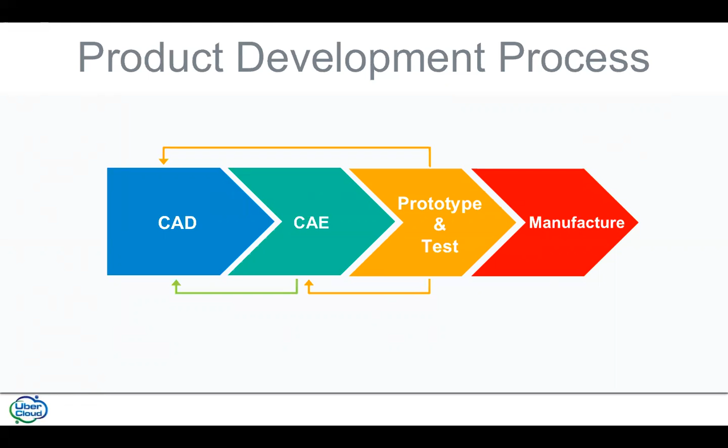Coming back to this process, as you're all well aware, if something fails after prototyping during testing, which is a very expensive phase, going back and repeating the whole process will only add up to the costs. And product time to market and development costs will increase as changes to design are introduced later in the product development process. So by introducing simulation early in the design process, you can speed up product time to market by starting with a mature design validated for simple test cases, save costs by shortening time to manufacturing, introducing less design changes, and also by reducing the number of simulations required to be run by analysts.

And then through design exploration, you can create more innovative designs and become more competitive. So rather than going with what you know would work, you can actually try out new ideas. So wouldn't it be great to let designers do preliminary simulations and let CAE engineers work on the more complex scenarios?

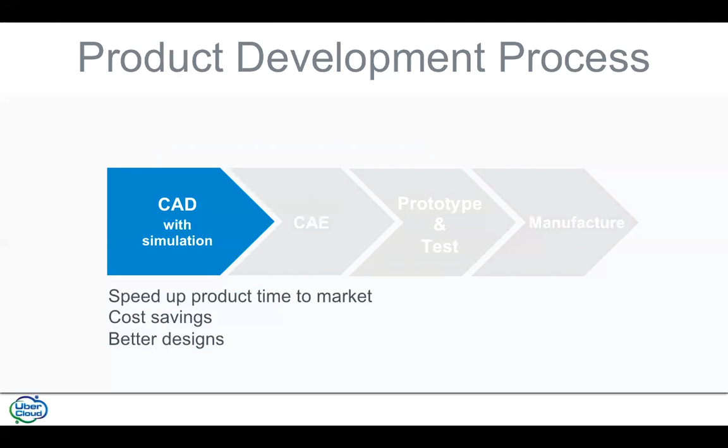So far, there have been barriers. Obviously, with many commercial CAE software, simulation expertise is required to get accurate simulation results. Then, specialized hardware, such as CPUs, GPUs, are needed to perform the simulations, which can be very expensive. And IT resources have to be available for hardware, software, purchasing, licensing, configurations, and so on. And all of these can easily lead to very high costs.

Because no simulation expertise is needed to run ANSYS Discovery Live, necessary steps to run a simulation such as geometry cleanup, meshing, solving, post-processing will all be handled by Discovery Live, and you'll be able to set up your simulation within minutes through a simple interface.

And then with cloud computing, there's no need to purchase expensive hardware. So you'll only pay for what you use. And there's also no need for IT resources. Your cloud provider will take care of everything. You'll get access to the hardware with the software pre-installed and ready to run. And of course, all of these will translate into cost savings. And not just from the implementation and execution perspective, but also there'll be cost savings because by starting with a more mature concept, product development process will be much shorter.

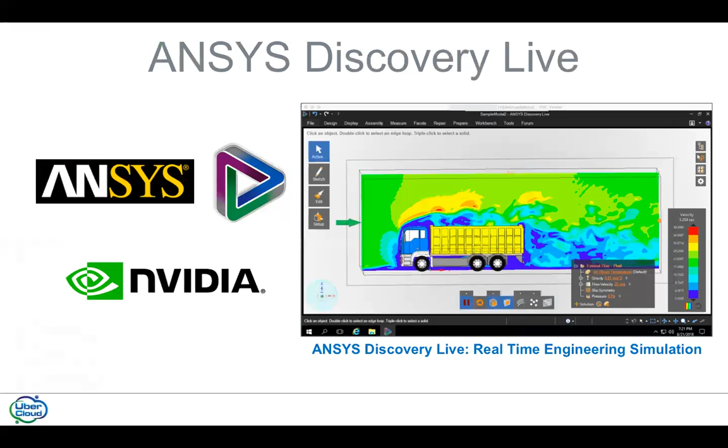And if you're not familiar with the concept, simulation in the cloud provides a cost-efficient, fast alternative to running simulations on your workstation or on-site clusters. Through a cloud provider, you can get access to the latest best-in-class hardware without large investments, and you can pay for what you use and how much you use.

UberCloud can give you instant access to a computer environment in the cloud with Discovery Live pre-installed and ready to run, and also equipped with the latest NVIDIA GPUs. So this way, you can focus on your design and not spend your time and resources dealing with things like hardware, software purchase, setup, licensing, installation, or configuration. Once you're signed up, all you would need to do would be to log into your cloud environment from a web browser and run your simulations.

Which also means you don't have to be present at the office anymore. You can actually work on your design exploration from the comfort of your home. And this is also how I recorded the demo I'm going to show you within the next minutes.

And last but not least, UberCloud can also provide you with support for break-fix services when something fails, and can take care of software maintenance. There can be multiple ANSYS releases a year, and we can make sure you work with the latest version or your desired version of the software. And also we can provide you with training on how to work efficiently within the cloud environment.

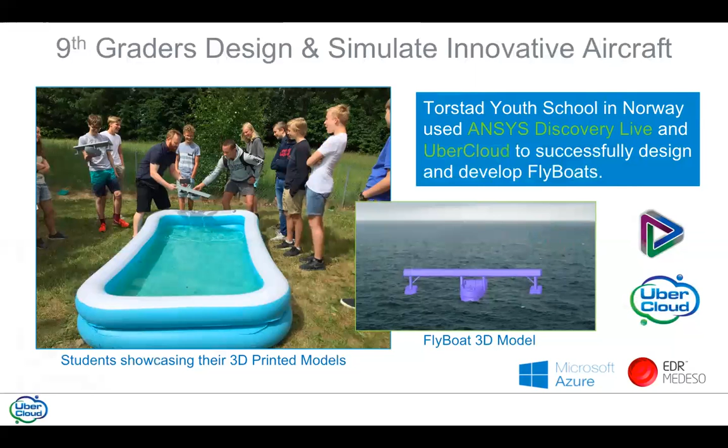So now, before I move on to the demo, first of all, let's talk a bit about how it all works. Once you sign up for Discovery Live through UberCloud, you'll receive an email with your login information and instructions. And then all you need is an internet connection and a web browser.

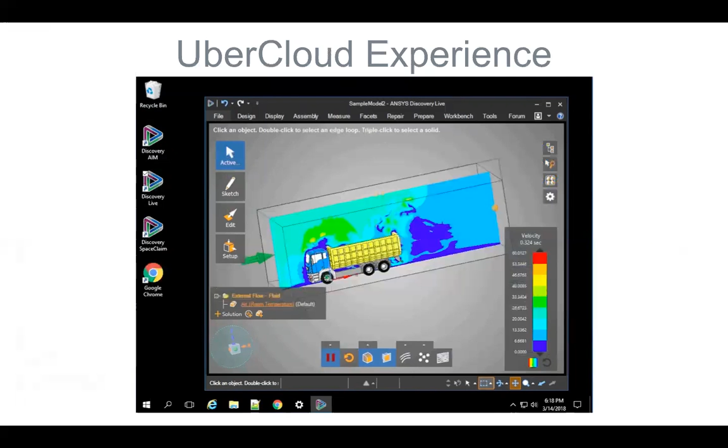And don't worry about things like how to transfer your files or get your results back to your local desktop. Anything that might affect your workflow, we've got you covered for all of that. As an example, you'll even have easy to use tools such as Dropbox installed on your cloud desktop. And now let's move to the demo, to the fun part.

So I recorded this demo for this webinar, and I must add that I'm also new to Discovery Live, and thanks to its intuitive interface, I was able to start using it right away. And it should be very straightforward for anyone already familiar with design tools. So my purpose with this demo here is really to show you two things. First of all, how you can do real-time design exploration powered by NVIDIA GPUs, because this is something new and groundbreaking. And then I would like you to witness the cloud experience.

So this video is as is, recorded in real time. There are no edits. And you will see how easily I can manipulate the 3D model without any lag and explore 4 different what-if scenarios, all happening in under 2 minutes.

That being said, if the resolution you're getting on your end is not that great, don't forget you're viewing this through a webinar software, and there might be some loss in quality. But if you're interested, let me know, and I would be happy to send you the link to the original video later. So watch my clock here, on the bottom right corner of my screen. So this is the clock on my cloud compute desktop, and currently it's showing 7:17 p.m.

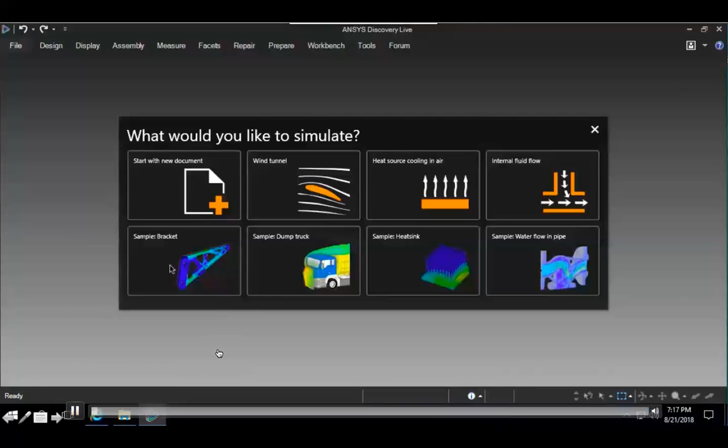So in this example, we want to find out what happens when we apply a force of 200 newtons to one end of the stainless steel bracket. And you can see here the resulting deformation.

And now let's see what would happen if I choose a lighter material, aluminum, instead of stainless steel. And results are already available. In real time, I can see that I get almost 3 times more deformation. And animations are great. And don't forget, I'm connected to the cloud compute environment through a web browser. So this is all happening in the cloud while I'm viewing and editing from my local desktop.

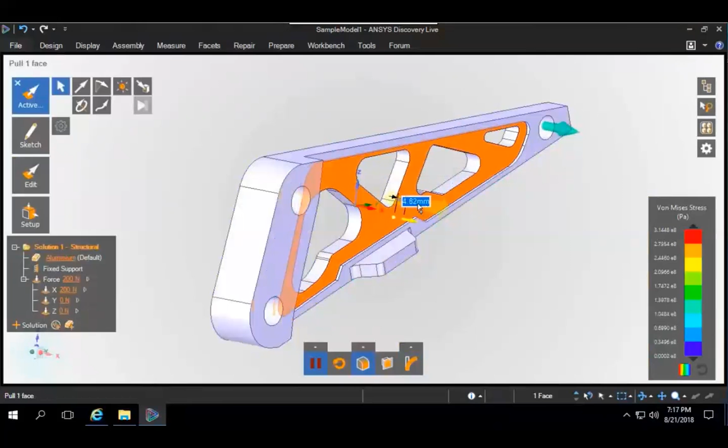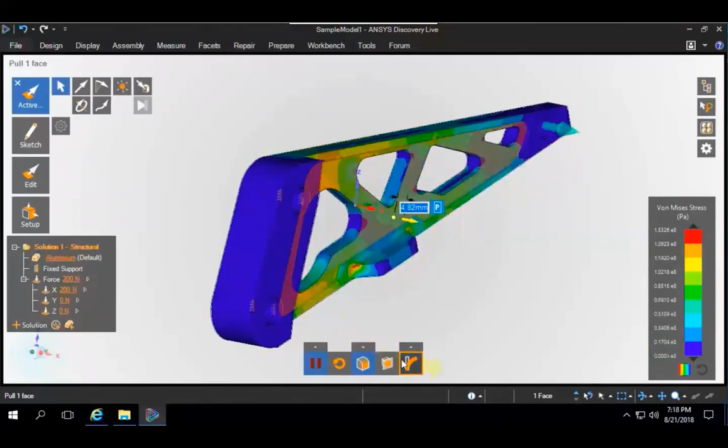And now I'm going to make some geometrical changes, make this bracket much thicker, 4.8 millimeters. And results are again updated. And this time I can see there's far less deformation. And finally, I'm going to change the direction of the loading. So instead of applying the force along the x-axis, I will apply it along the z-axis. And again, you'll see new results are available immediately.

So now let's look at the time here. And you see it's 7:18 p.m. So you witnessed all the design and loading changes in under 2 minutes. We reviewed simulation results for 4 different scenarios. First one being the base model with stainless steel material. And then second one, I tried out using a different material, aluminum, for the bracket. And third, I changed the thickness of the bracket to 4.8 millimeters, making it thicker. And finally, for the fourth scenario, I changed the loading direction.

So all in under 2 minutes. And there was no waiting for simulation results. Results were available as soon as I introduced the changes. So as you saw, UberCloud provides a seamless cloud experience.

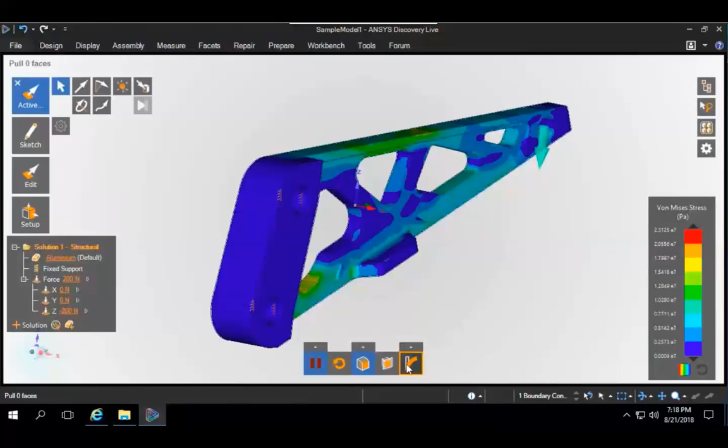So now, as time allows, we'll be taking some questions, and I will hand it to Thomas. All right, great. Thanks, Ebru.

So there's a question here about licensing. How does licensing for all of this work? That's a great question. So the best way to get an answer to that for the ANSYS Discovery Live part is you can work directly with ANSYS or your reseller, or if you'd like, you can contact us and we'll work with ANSYS on your behalf or along with you. As Ebru mentioned, we're an advanced solution partner. So that means it's a technical partnership. We're not an ANSYS reseller, so we don't really sell licenses, but we can help you find the right person for that.

Let's see. Is this a replacement for ANSYS solvers? Yeah. So this is a common question that comes up, and the answer is no. I think it should have been obvious from the demo, where this is a quick and dirty tool which really gives you a lot of great information in a very, very short amount of time. But it is not a replacement for, say, Fluent or Mechanical Enterprise or CFX. This is a way to get more accurate models over to the analysts and have that available.